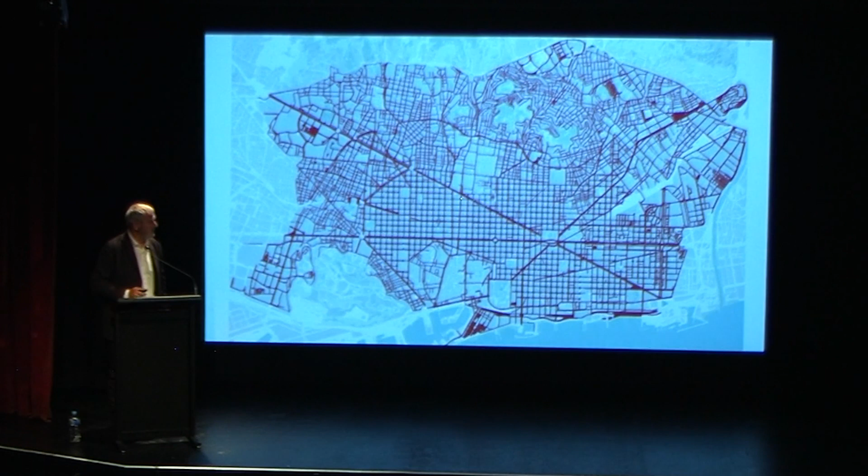Making other uses of those streets - at the end, the city is full of concrete, asphalt, and cars. In our Mediterranean cities, summer is very hot, and every year it's hotter. We need to adapt to this climate change. We need to remove all of this, and reduce temperatures by 3 or 4 degrees if we want to project into the future.

This is the proposal that I developed in 1987. But at the end, when the framework and the elements to make decisions are mature, it's possible to change, and in that moment it's very quick to change and regenerate the cities with this Superblock model. In that case, we realize practically 70% of the surface of the city today, involved with mobility, in particular car mobility, is released with the Superblock model.

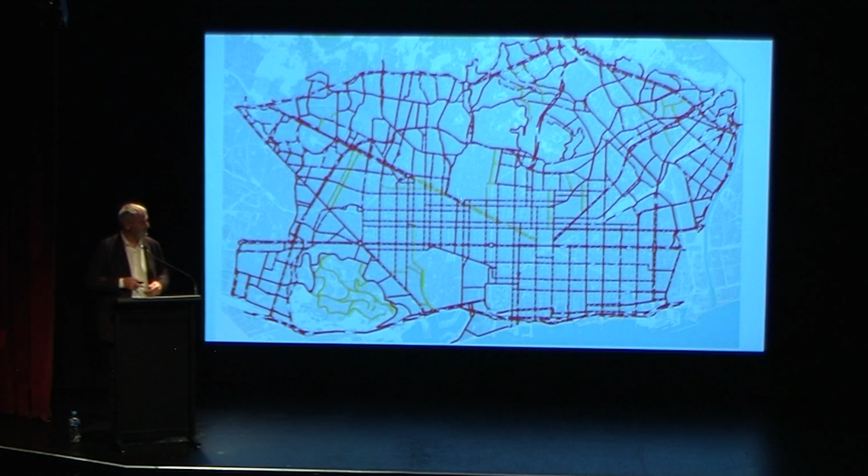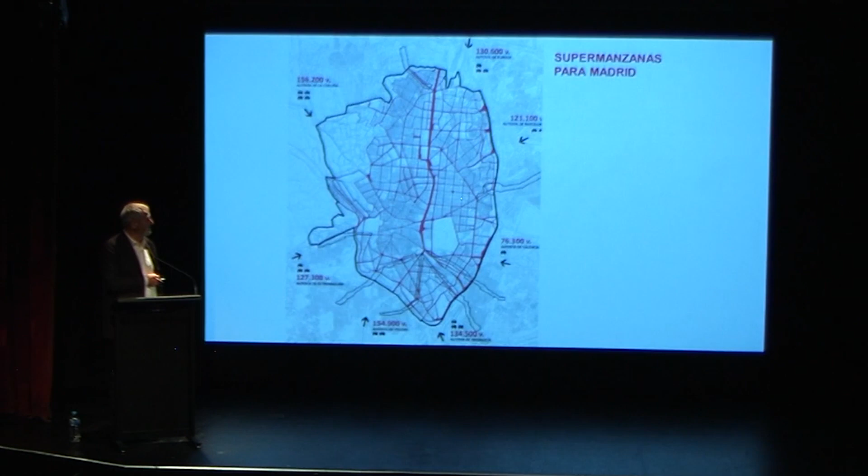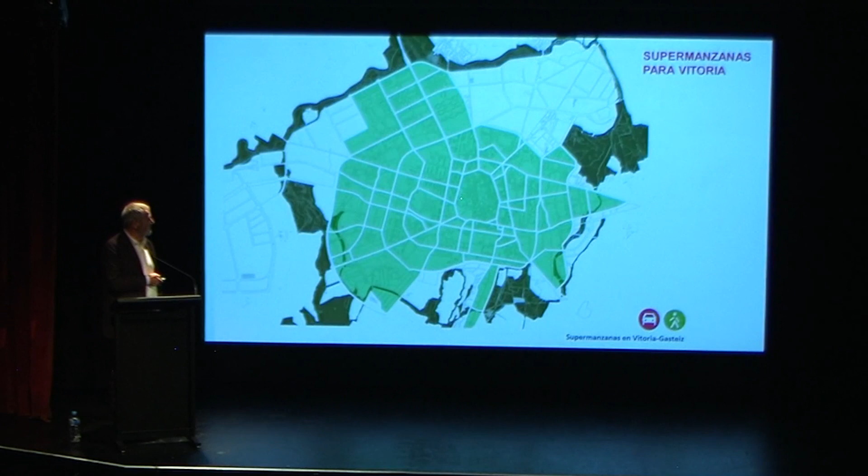Like Barcelona, at this moment we are working in Quito, Madrid, Asunción in Paraguay, Buenos Aires, Bogotá, Vitoria-Gasteiz, A Coruña, Córdoba. A lot of cities are working with the same model, because we need to change our cities urgently.

It's not possible to change just different little parts or areas inside cities. If we want to reduce greenhouse gases and mitigate climate change, we need general solutions and to implement them very quickly, perhaps in 10 years, not more.

In the case of the Barcelona example, we know that 15% is not a problem for traffic. It's not a problem, because it's a percentage similar to what we saw during the economic crisis. And nothing happened. It's not a traffic problem.

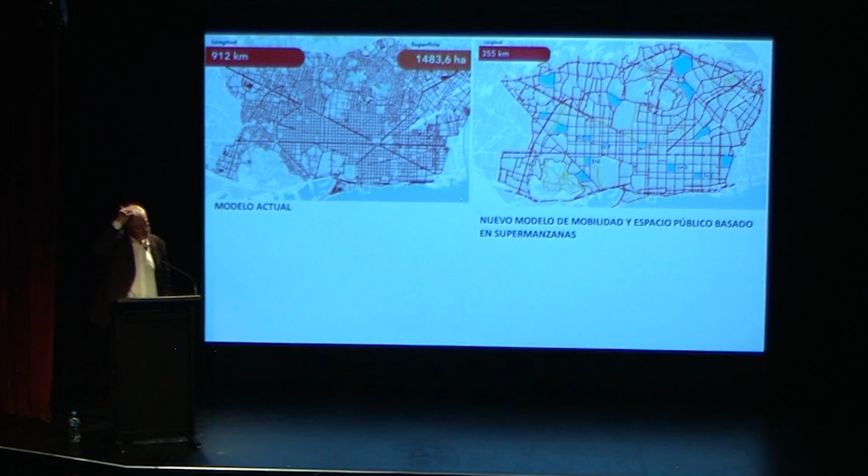But we need something like that. The superblock model is a network. This is the current situation, this is the superblock model - it's a network. And it's a model because it's possible to implement in every city. It depends on the morphology and characteristics of the streets, the main streets inside the city, so the results of the grid will be different, accommodated to each city.

It's for this that the shape of the superblock is different, because it's accommodated to the morphology of the city. But the model looks for the maximum efficiency to release the maximum number of streets with a minimum percentage of traffic loss.

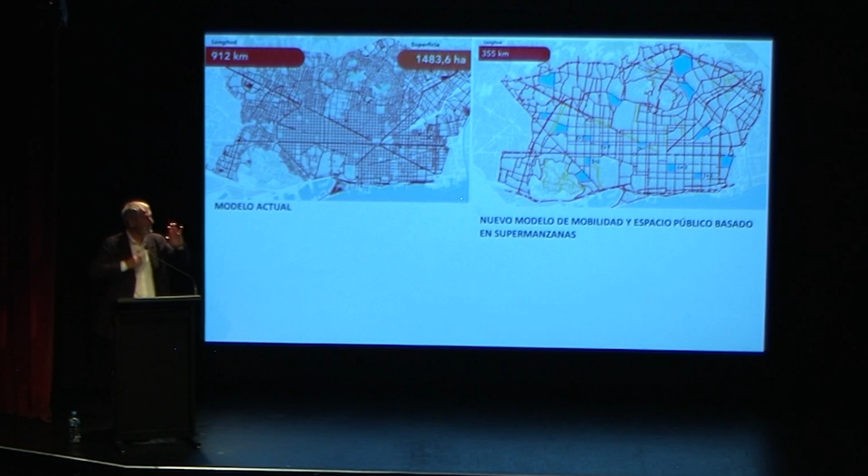70 for 15 in that case. And after that appears this, a typical superblock in Barcelona in the Eixample fabric, at left, where in the perimeter we have all modes of transport of the city, because these streets are specialized to connect the different points inside of the city. It's for connections.

In Barcelona, and I propose also here in the CBD, we will see, it's the public transport which defines the perimeter of the superblocks. In the case of Melbourne, in the CBD, it's the network of trams.

The length of this part of the perimeter of this site is 400 meters. For 400 meters is the same length as the distance between the lines of trams in the CBD. It's perfect, it's already made. After that, only need dream. We will see what is the dream, because at the end, we don't break nothing.

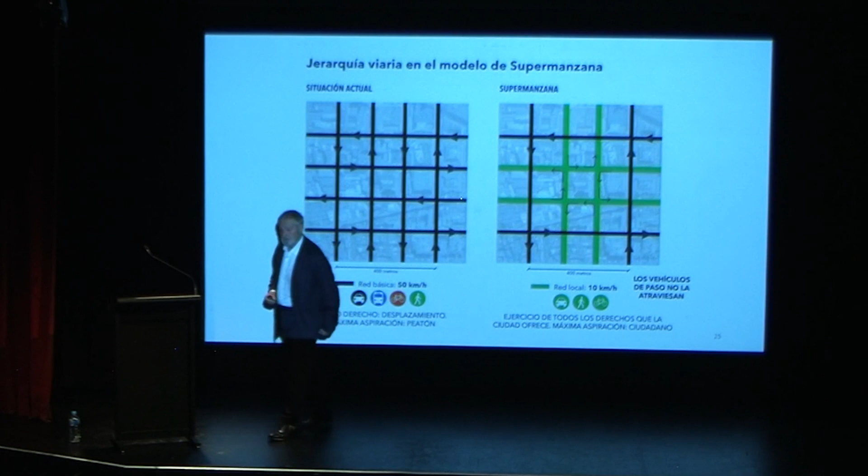It means that you can connect with all the facades of the buildings. If you want to go park, or for delivery, it's possible to arrive. That's it. It means all people can arrive to the destination, but with some constrictions.

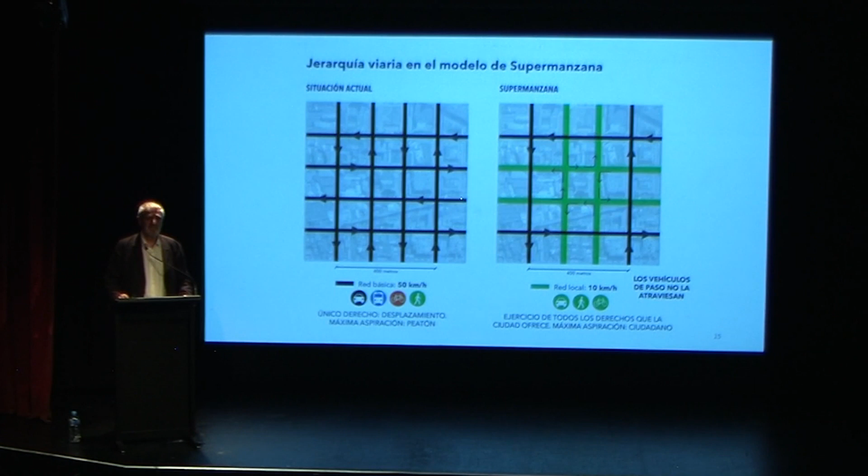For example, the first is the speed. Inside of the superblock, 10 kilometers per hour. Because with this speed, we can use the public space for all the citizen rights, even children playing in the middle of the streets, or vulnerable people going in the middle of the streets safely. For example, blind people. Because the public space after that is for people, not for cars.

For different uses, we can see also pedestrians and bicycles can go in both directions, but at 10 kilometers per hour. And even if the uses in the public space are determined where the bicycle is not possible to ride, the cyclist must go with the bicycle inside. But normally, it will be possible to cross in both directions.

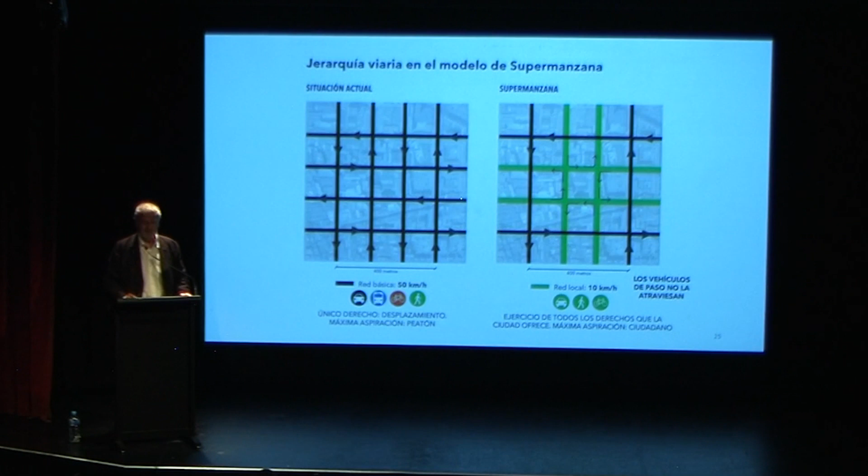Here we have the current situation, the superblock, and here appear the new pedestrian streets. 7 million square meters released. And here we have the other mode of transport networks, in that case the public transport, bicycle, and this is the integration of all modes of transport. And also we can see different green corridors, because we can change car for trees or vegetation.

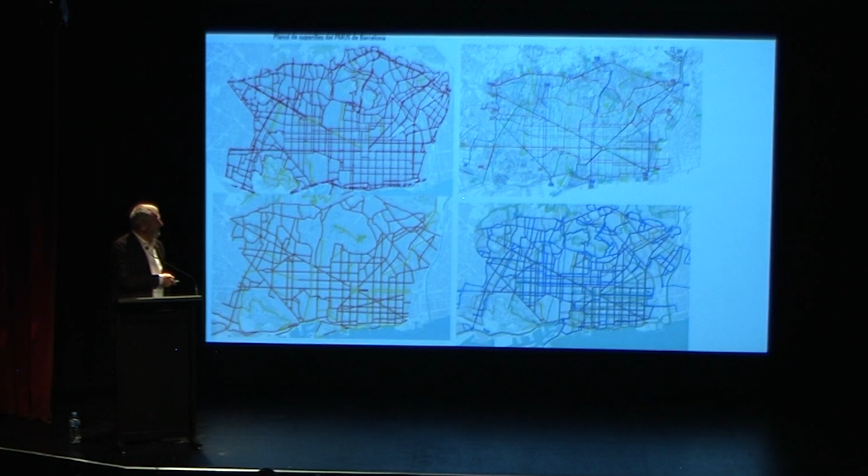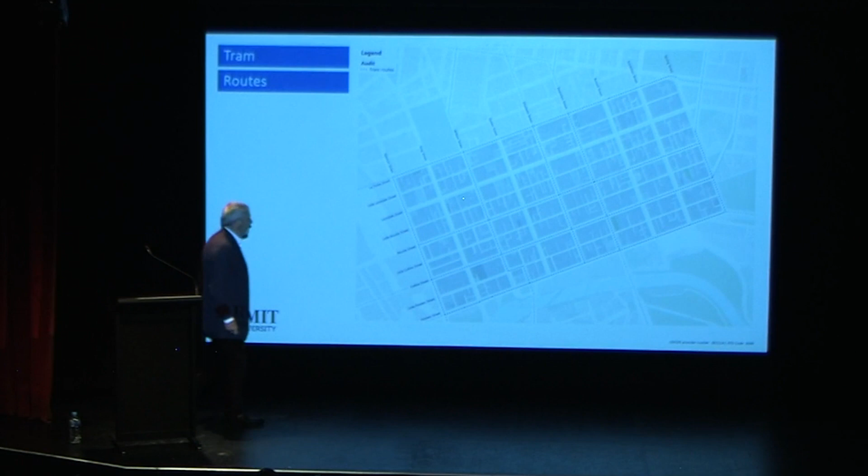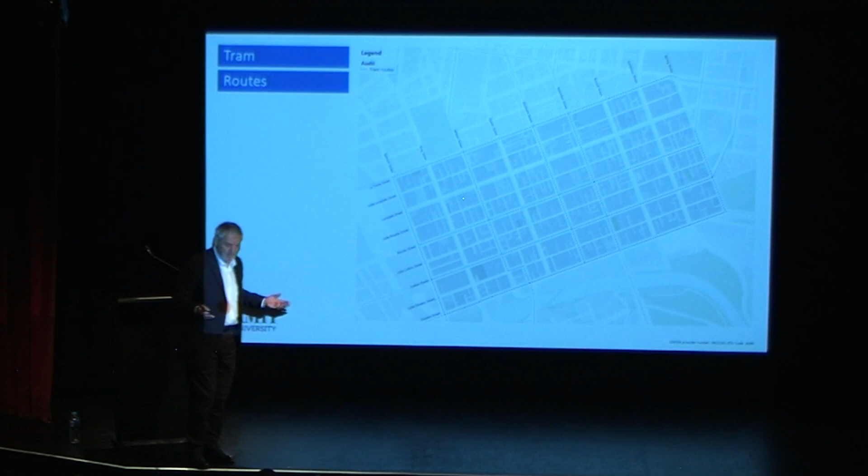In the case of CBD in Melbourne, we have here the superblocks already designed for 400 meters. In that case, 200 for 400 meters. We make this accommodation because it doesn't matter. But at the end we have 12 superblocks in 2 square kilometers.

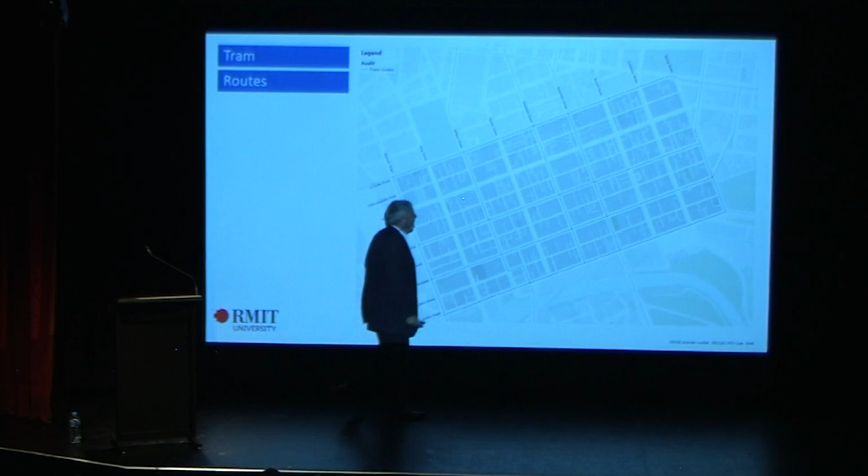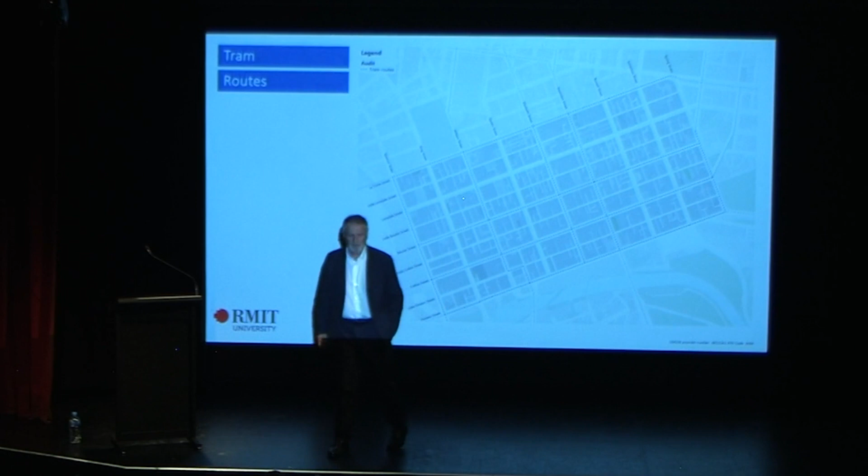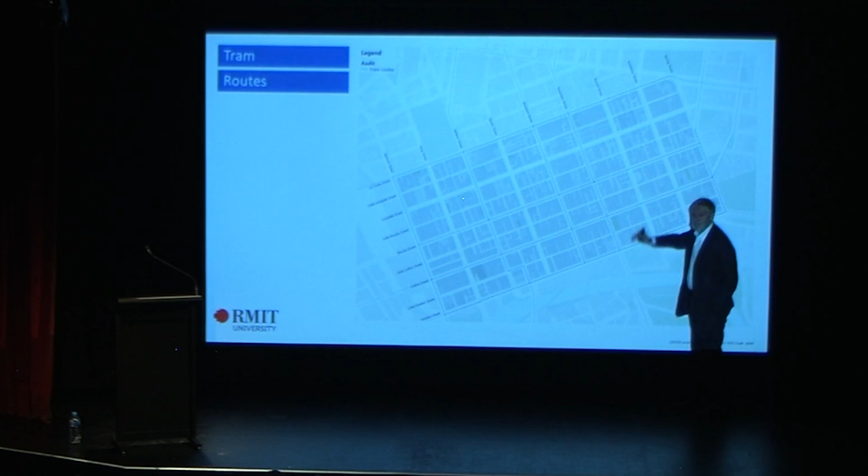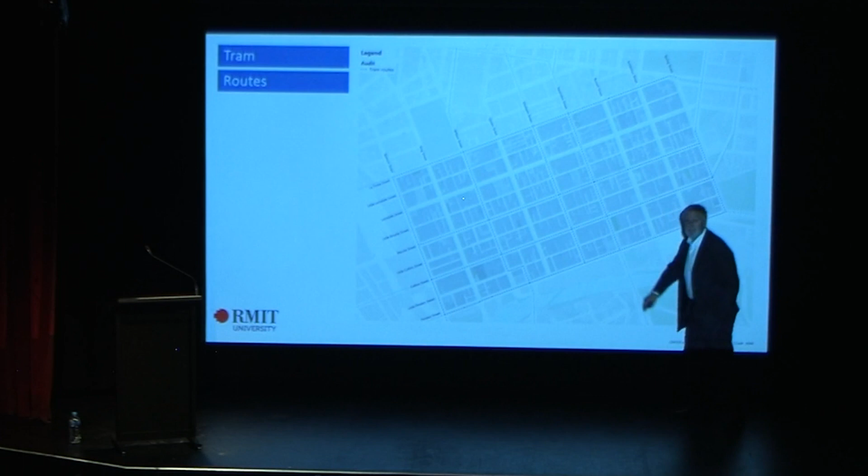In that proposal, we have here in Swanston the tram. But if we want to make this area more livable, we can change this line to Russell Street. The reasons are different, I don't have time to explain; in the workshop we explain it. But the main street with the most urban quality in that moment in the CBD is Swanston Street.

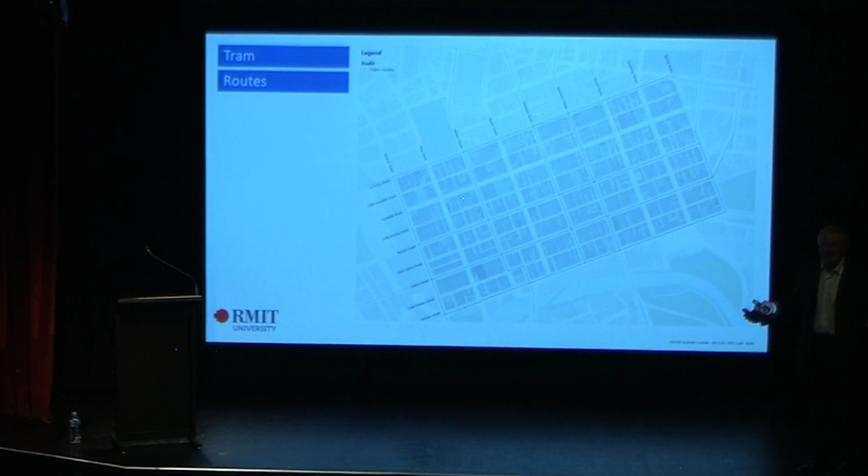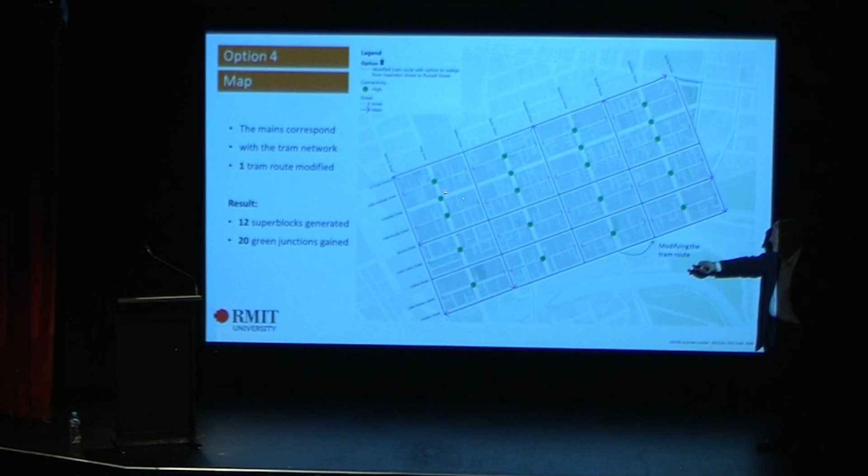But with the tram, it's not possible for the kids to play in the middle of the street because it's dangerous. At the end, if we have this, we get, in that case, 20 junctions, where this junction is practically 100 square meters, a new square in that junction.

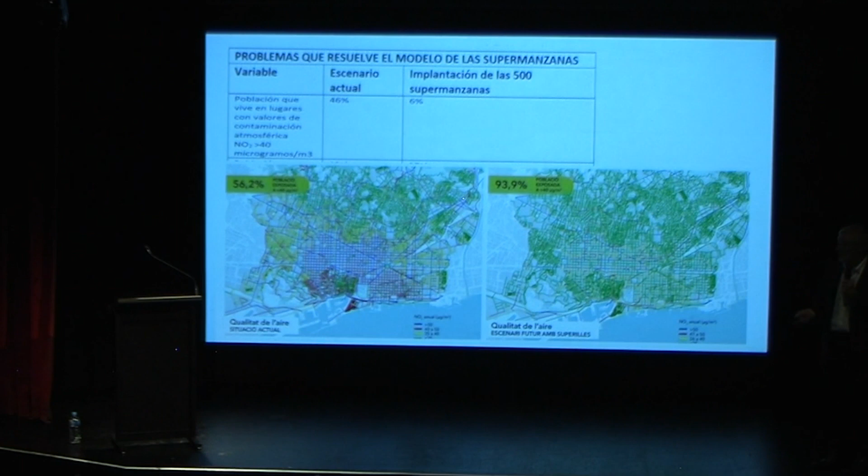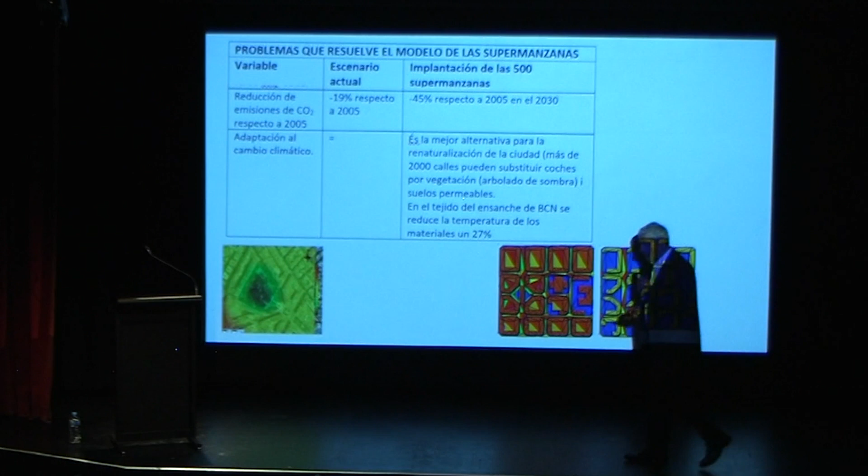The noise is similar, and the temperature is also simulated for us, and we can reduce practically 27% of the temperature of the material surface. 27% is a lot.

In that case, we can have, for example, a thermography by night in a part of Barcelona. In green, we can see how it reduced 4 degrees the temperature, because it's a green area, a permeable area. Here we have the surface temperature of the materials in this area of Barcelona. We can implant the Superblocks and reduce 27% of this temperature.

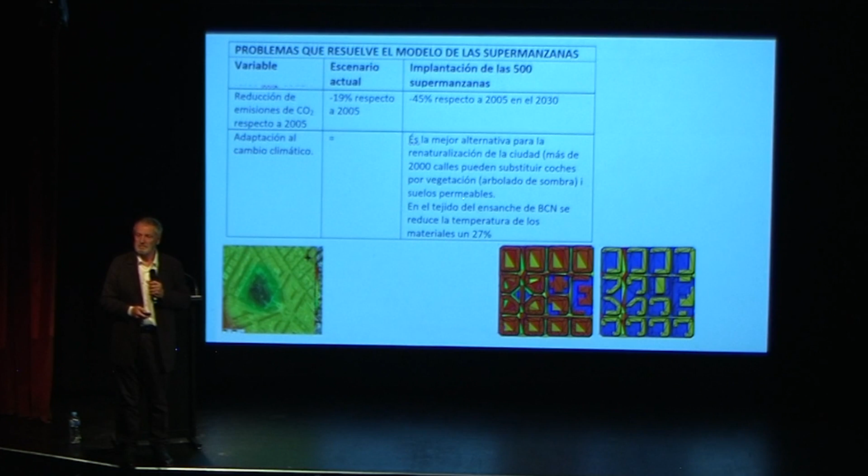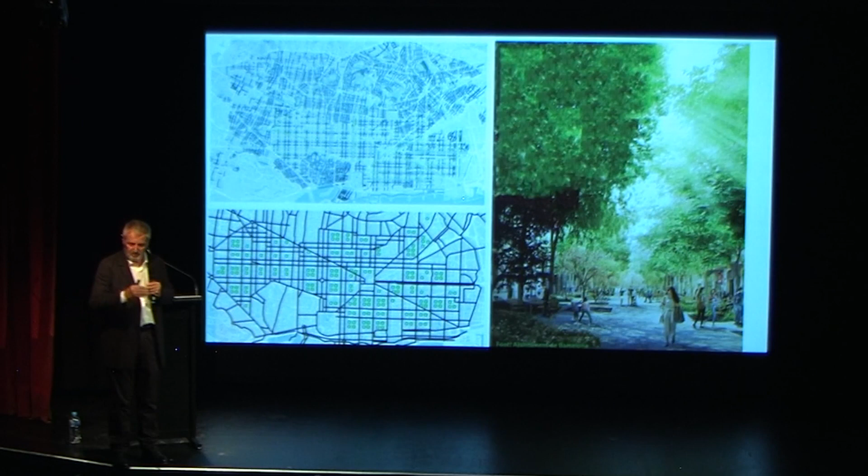The biodiversity also increases a lot, because we can renaturalize the city. In the case of Barcelona, we have the possibility to change the uses in the cross sections, in the intersections of the streets. And we can get 163 new squares of 2,000 square meters. In a typical Superblock, we can get 4 of these, practically 1 hectare, close to the residence places.

And this is one of the tactical solutions. In this case, the museum inside of the Superblock in Poblenou gives the city these sculptures, to enjoy in the public space. The city council includes all of this furniture, and it's always full of people eating. The workers go to eat when they finish, or when they have a break, etc.

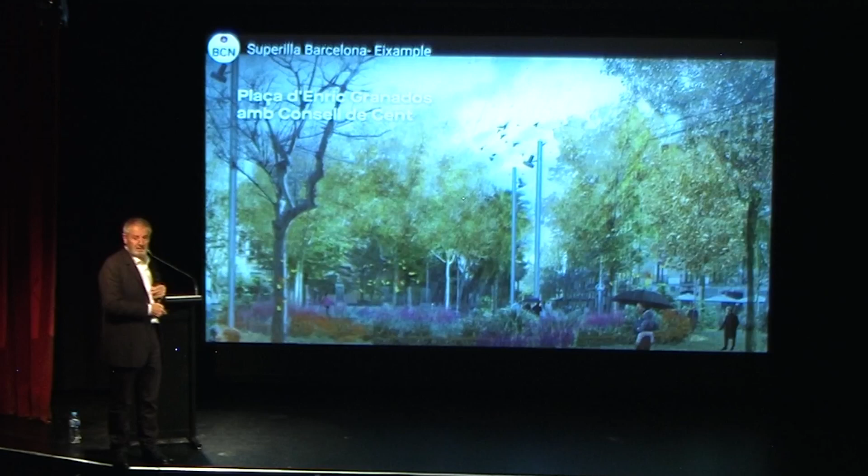This is another thing very important in my opinion, because you can see here 2 lines of trees, the ancient and the new. The idea is to make a cover and make shadow on the street, a canopy, like an umbrella. We need something like that. And the new solutions in the new streets, in this process of regeneration, inside of the Superblock model, the pavement is also permeable.

Different solutions. Imagine how Swanston or the other streets can arrive. What is the landscape that we can imagine after that? Okay, this is the part of the public space and mobility.

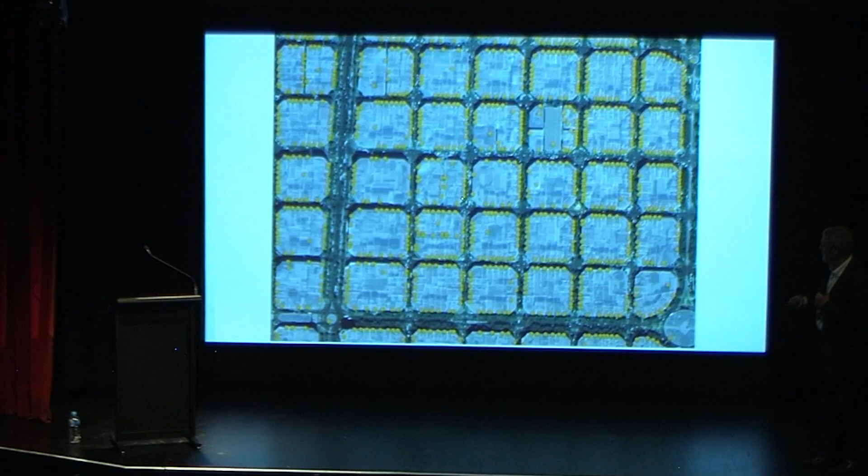Also, we have a zoom of this area, and we change every point, not every point, because if not it's not possible to read what I want. We make something like that, changing the point for an ideogram. If I put all of them, it's all occupied. It's impossible to read.

But the idea is to implement a message, because this is a new dictionary to read the city. Every icon is a word.

And with the information theory, I can calculate what is the information inside of this message, like biodiversity, it's the same. This is the calculus of an entropy. And at the end, I have here a sentence, and this other more diverse sentence.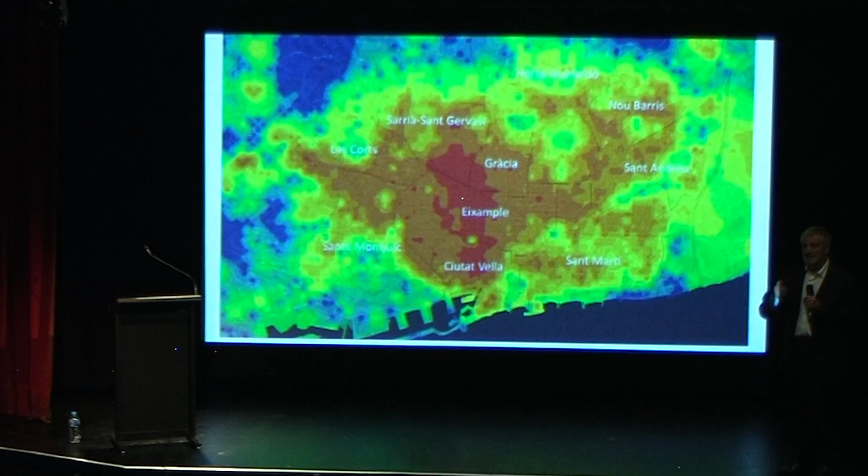In that case, the density of activities is different from diversity. And we have here the proximity, because it's the simultaneous coverage of...

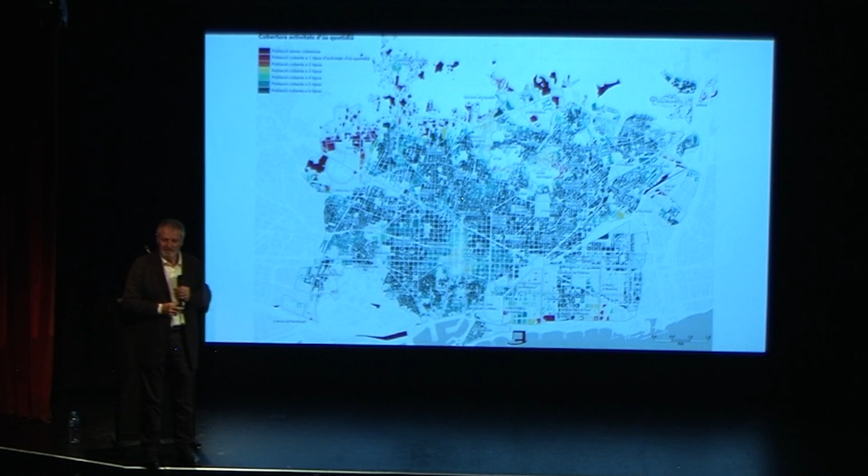Another important thing in the case of the superblock model is that in all the cases where we implement a superblock, economic activities increase at least 15%. We have a lot of superblocks with more than 50% new activities. It's easy to understand because the urban quality increases a lot, and then it's the best attraction for activities to go inside the superblocks.

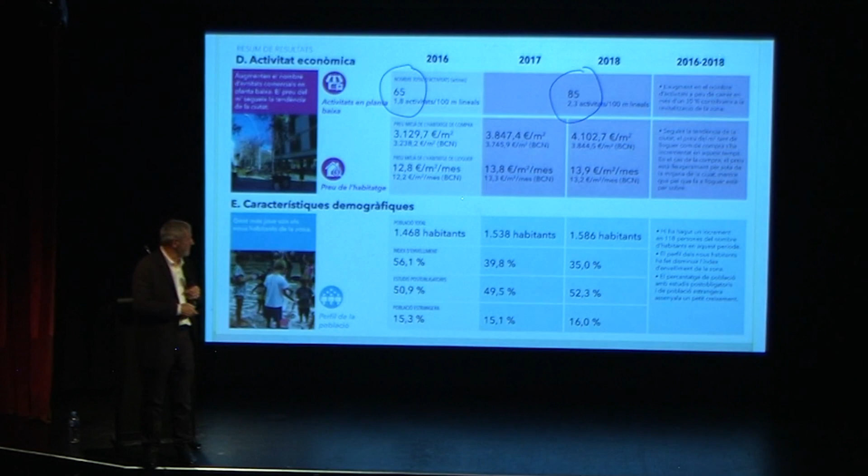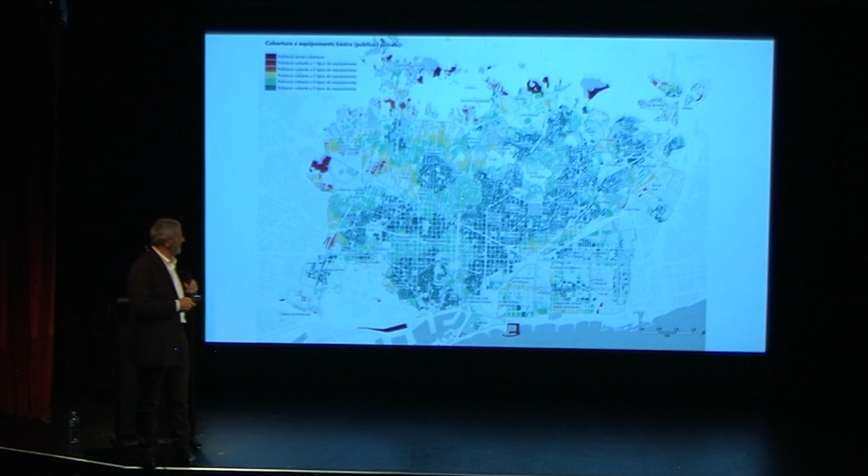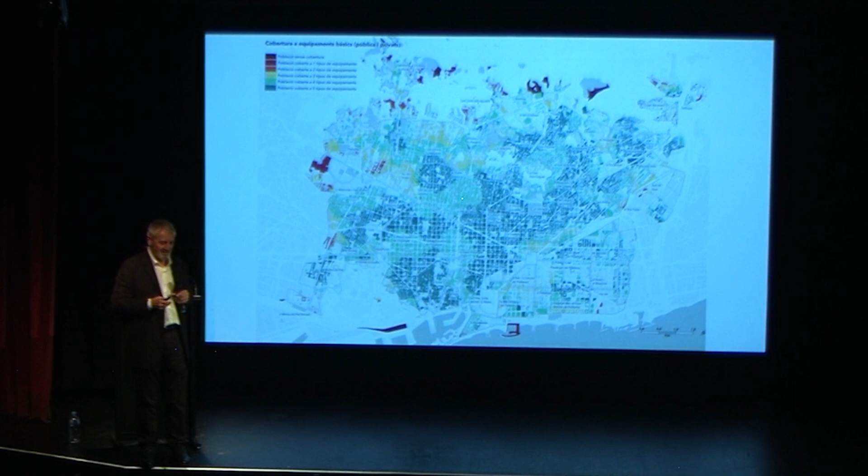Public, but if we include also the private, then in that case it's not 5 minutes, it's 10 minutes, it's 600 meters. We can see how in Barcelona practically everybody has 5 or 4 basic facilities to live at least within 10 minutes walking.